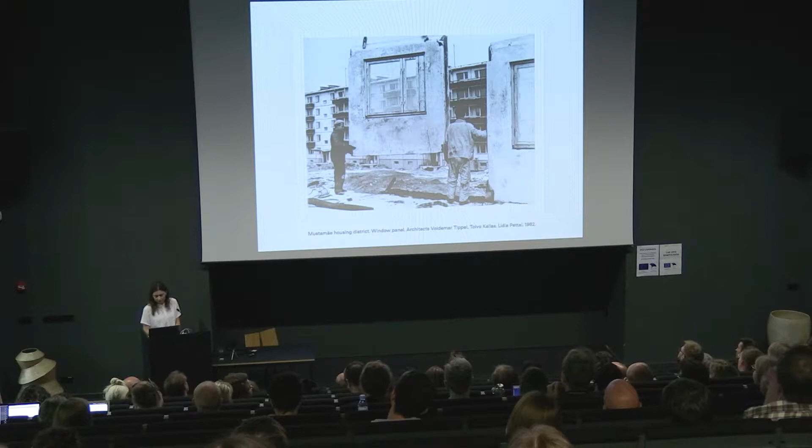Yeah. So the panelization, modulation, and element-based designs, as what we have discussed today a lot. The material innovation was mainly in concrete, or in recent years more in steel and glass. But the timber has risen, meaning that it's reaching higher levels, once again becoming part of the mass production and re-entering the materials library of architecture practitioners.

But nonetheless, the timber construction has the same syntax, tectonics, as the precast concrete panels that we just saw before. And it's also visually quite similar. So for an architect overwhelmed with the abundance of possible directions and applications that contemporary digital tools are offering, the field of construction still remains brutally simple, driven by laws and ignorance towards collaborative work. But of course, it's not only like that.

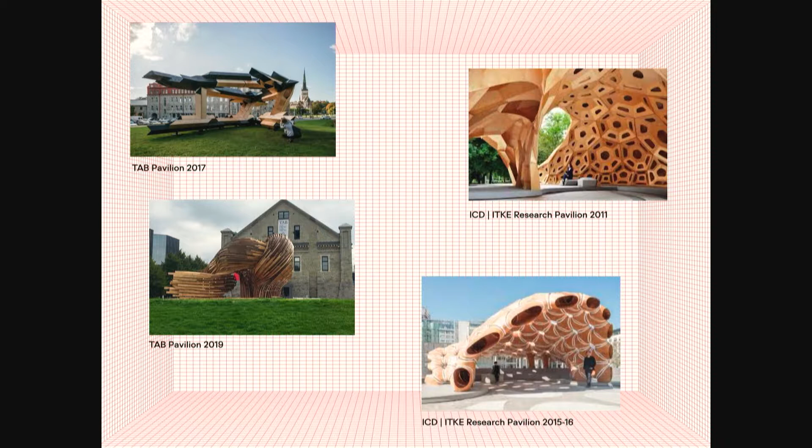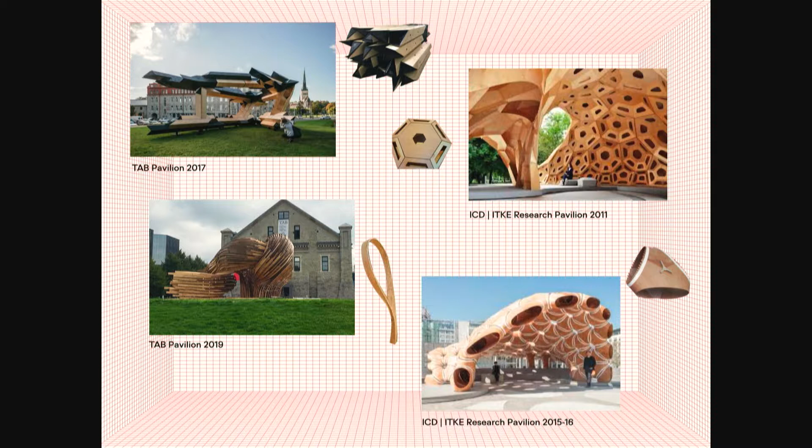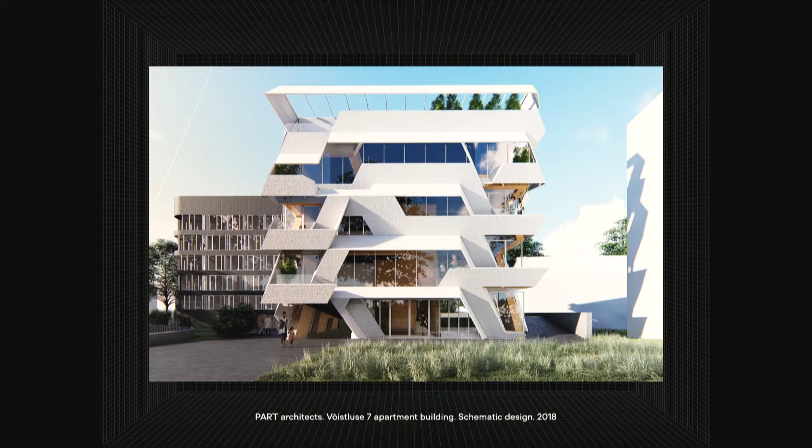So there's also a group of practitioners in the field of renewable materials trying to construct differently, where the new panel, the new module, the element that is repeating has its design implications from the smaller element towards the aggregation of multiple elements. So that's what we have been trying to do in our office, to combine building industry and standardized housing with research into modulation, aggregation of qualities, and of course, above all of that, spatial qualities.

So with this method, modulation makes it possible to move towards more flexible and adaptable architecture. The way we're doing it is to redefine the production chain of architecture from design to fabrication based on the computational understanding. So that has helped us to move from a non-looping method that you see here, what we've been trained in school. You're an architect, you get a brief, you pass it over to an engineer, to the manufacturer, and then it's getting constructed.

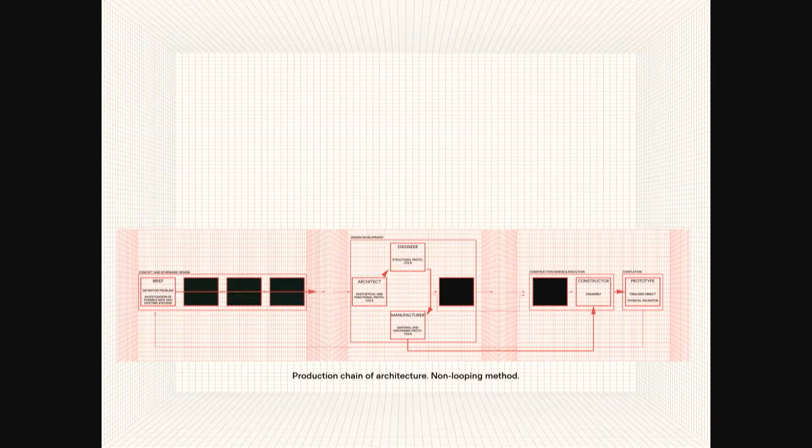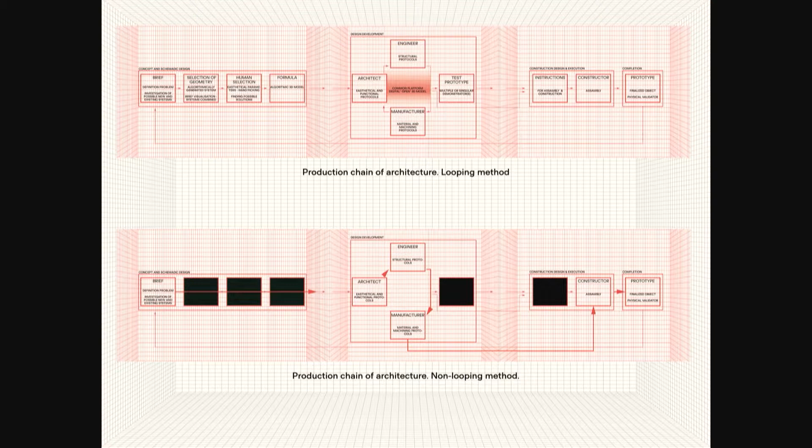And what we've been looking at is a way of creating a looping method. So it's a particular collaborative workflow between architects, engineers, and fabricators. Modulated prototyping provokes apparent design implications in tectonics and space organization. So the dynamic relationship between the digital, the material, and all the parts that have also been discussed before, and of course the design protocols, helps the prototypes become the key elements in design and fabrication process.

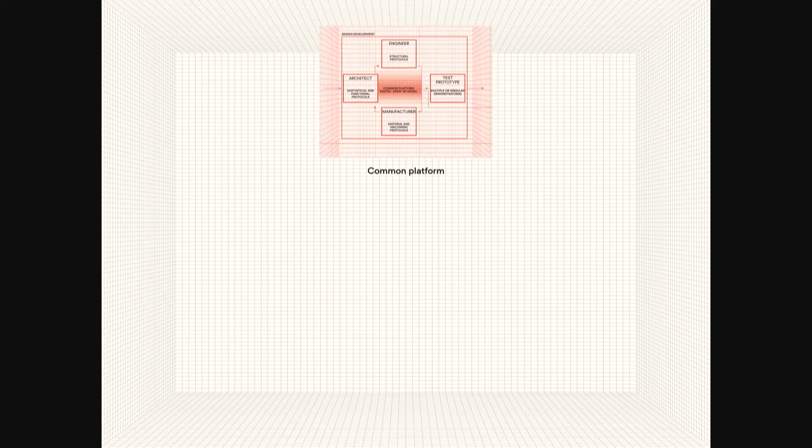So the central part, the common platform where the engineers or the practitioners are meeting, that is based on a discrete syntax, proposes a methodology that allows all component participants to work in a non-narrative manner. But one could also say that it smells like design by committee. So you're aiming for a horse, but you get a camel. I want to prove otherwise by saying that before entering the common platform, an architect does a lot of things, and maybe even more things than beforehand.

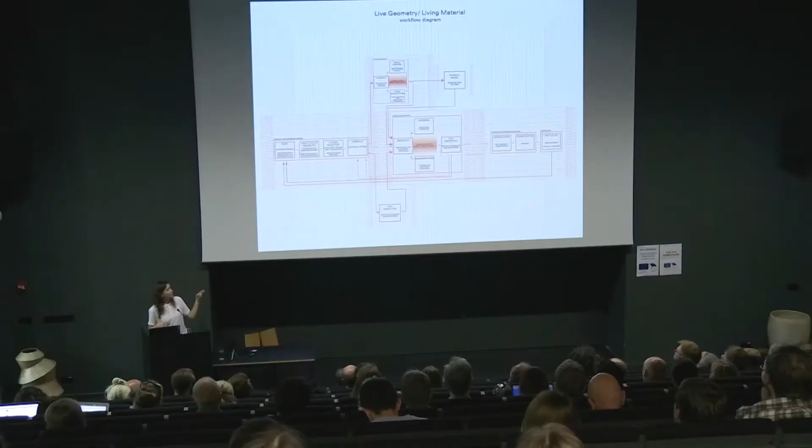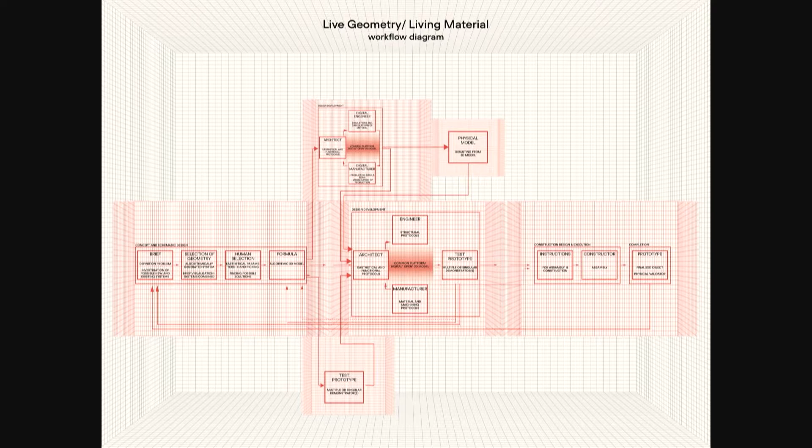And also now the practitioners are in a more constant information flux, meaning that it allows us to work with the live geometry, but also with the live material. And these are the two things that this allows us, meaning that the geometry is alive until the very end of the execution, and living material, that means wood, for example, is constantly being calibrated, remeasured, and informing us. So, for example, where we were designing a 45-meter high design pylon, electricity pylon.

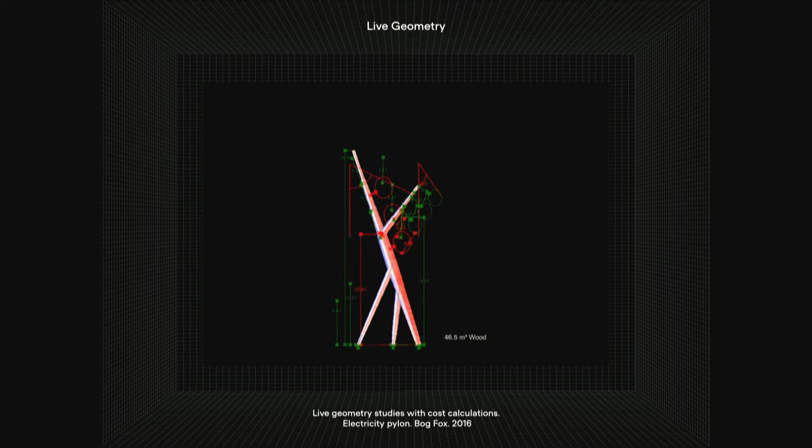We kept the geometry tweakable, so it's constantly calculating the amount of wood it uses, or the engineers applying all the forces there. It's calculating thousands and thousands of simulations of it, but above all, as a designer, there was always the possibility to find the perfect one for the need, and it is under construction at this very moment.

And the other one, this alive material, as said, this workflow also helps to work with it. So in constructing this one in 2015, the properties of the wood were changing because of the moisture, because of different treatments it got. So it saved us from re-milling the files of 350 pieces. Just one night before the fabrication, we got the information that the wood is 2 millimeters thinner than it should have been, and because of that, none of the joints or joinery would have worked. So taking that into account, we could quickly regenerate the outcome.

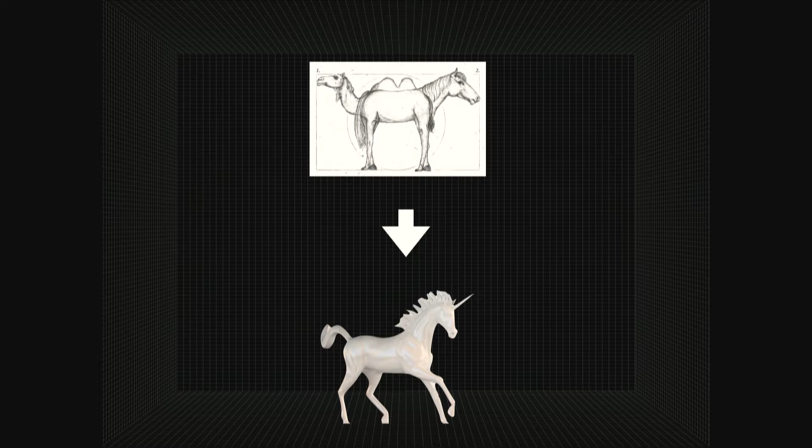So if there's a question, is that bringing us a camel or a horse? I think it brings us the unicorn that is fitter, faster, and more pure to its original design. It's all about the detail, as Jill also said. So this level of detailing allows us to reach better geometry, more specific, and as well working with fluctuating materials. So quick examples of those unicorns.

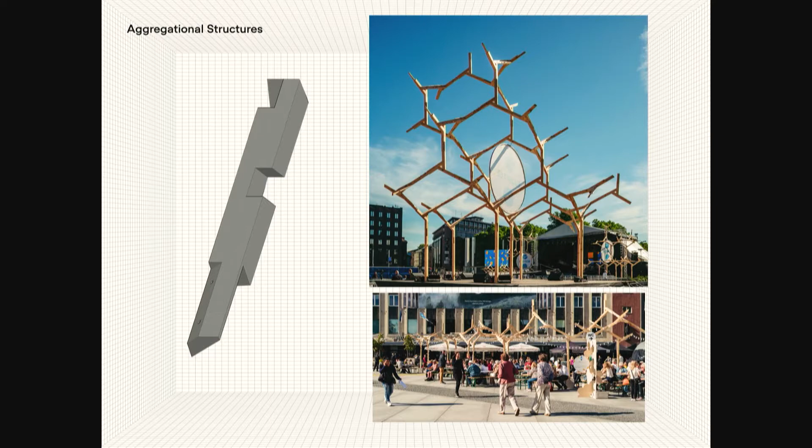So for the last 3 years, we have been working and looking more into aggregational structures, meaning that there's more repetition in the element, and they become the space-defining skeletons. So for example, this one is in the main square, the Freedom Square of Estonia, that was able to define the stages, the moving locations, the sitting areas. But it's all focusing on the structural space-filling elements that are negotiating between the modularity and the smart joinery.

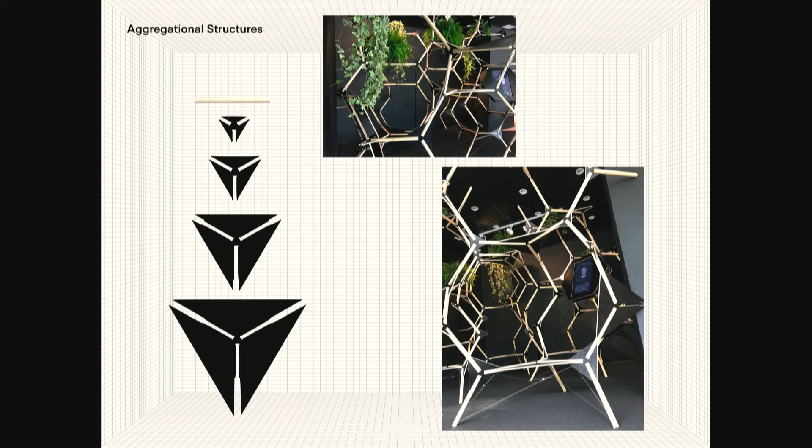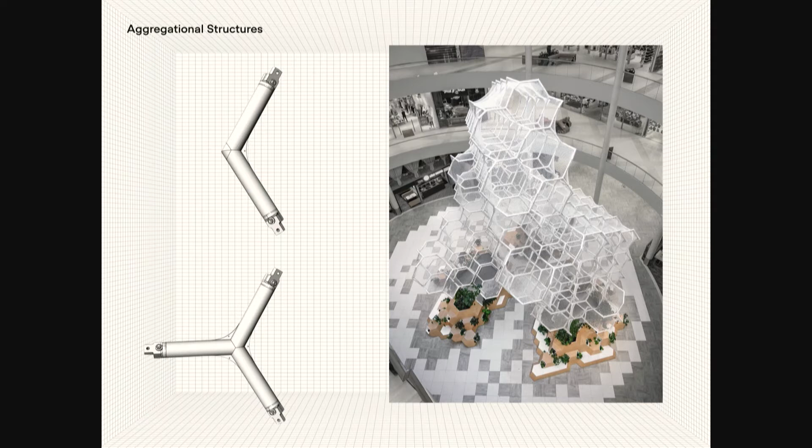And the joinery and the detail is something that has become the design value that then gets into the overall form. We also used a 5-piece method, again a minimum amount of elements to create a maximum area of seating and table. And the biggest one so far is this 18-meter one, again using 2 modules. That is a structure that has no vertical pillars. And all of this is to fill the shopping mall atrium. So in any case, the joinery has become a detail that defines or gives information about the overall shape.

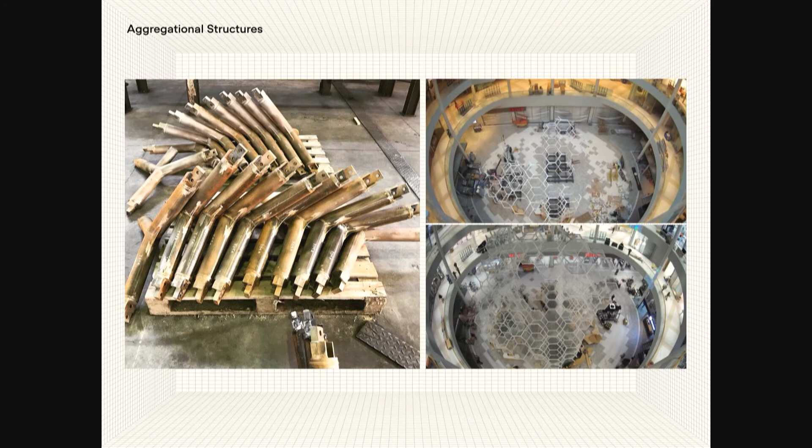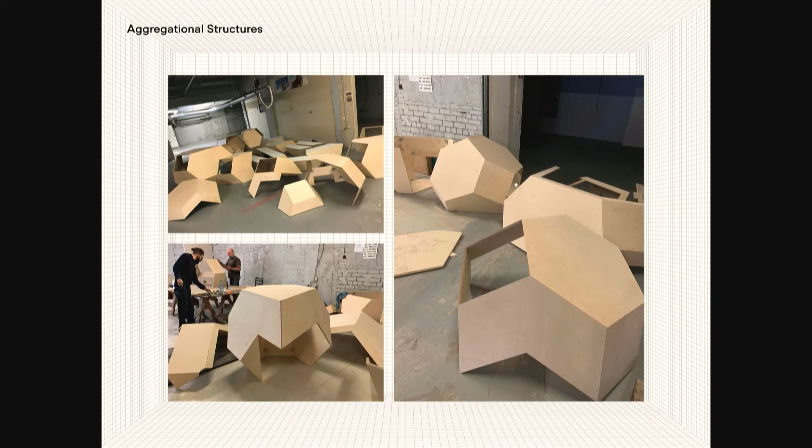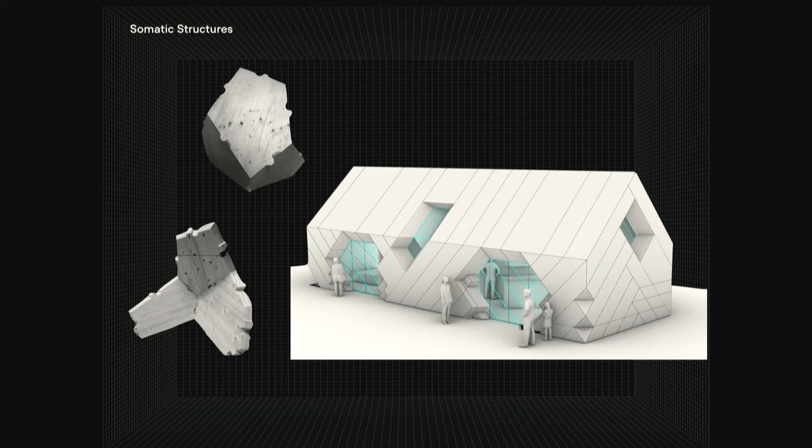So we also, of course, have been looking into more somatic structures, as we call them. So things that are structure also gaining space-defining membrane qualities. And that brings us to the bigger scale, where somatic structures have more closed modular elements that carry the structural qualities and also space-defining qualities. And these are the prototypes where we used for the first time in Estonia the 5-axis CNC for creating the CLT panels.

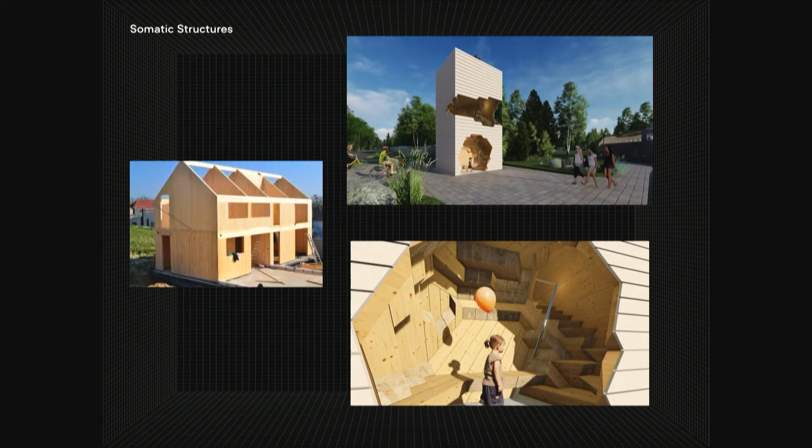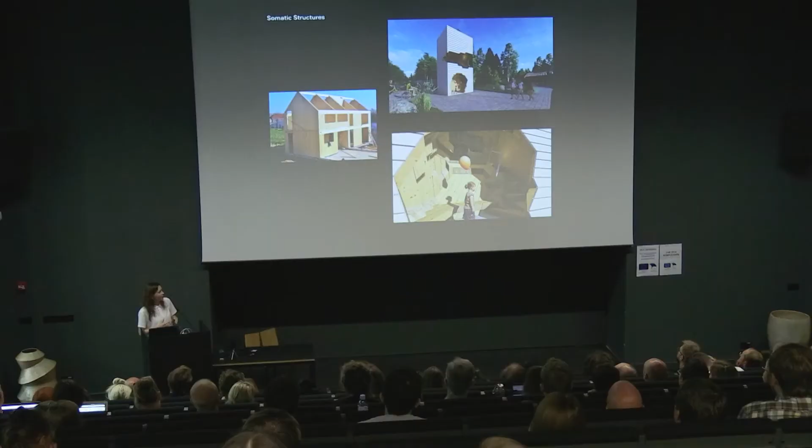Or we work close to the fabricators as well, who are saying that by producing those buildings, they have a lot of CLT leftovers, because all the windows and doors cut out of those big CLT planes could maybe be reused in constructing in our way, meaning smaller pieces, more aggregated, and in that sense also bring back the human scale.

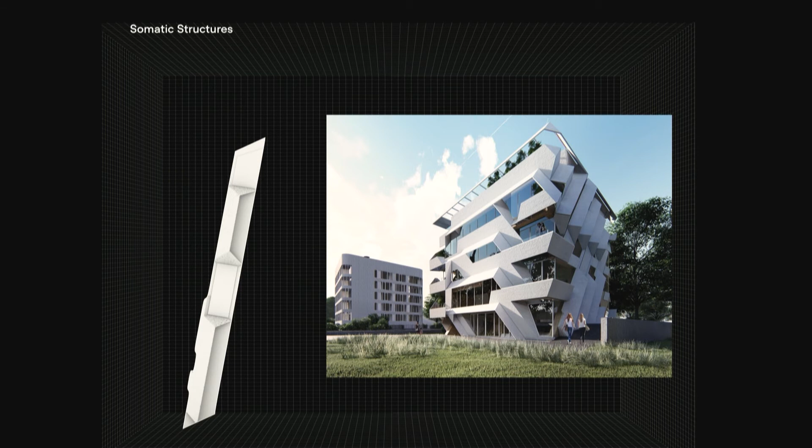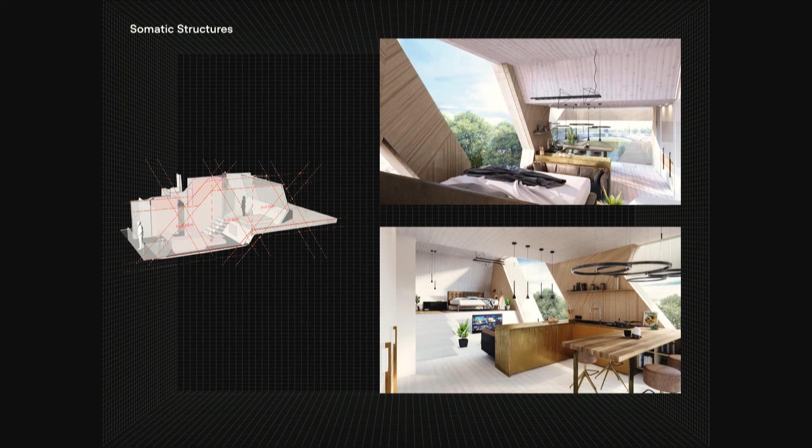And the last project, the apartment building: we're constantly evaluating the relationship between the design protocols and the prototype outputs, then looking at the one module, which we haven't constructed yet, which constantly helps us also to define the space. And the spatial flexibility that those modules give us is also helping to keep the readability of the module. Maybe not as pure as in Jill's cases, but it is organizing the compact system of the modules, functioning as structural elements as well as surfaces. So the purity of the material is actually here. We don't need to cover the interiors with any other plate materials.

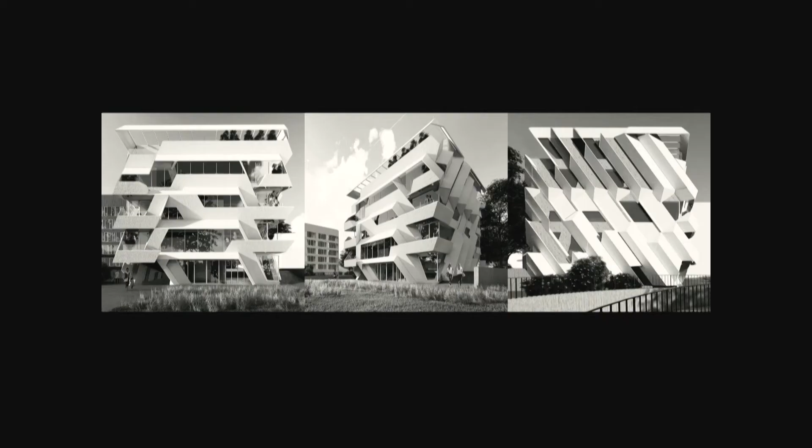So the methodology of the workflow analysis has given us new knowledge about how we design from part to whole, from detail to overall. So the applied protocols, parameters, and physical material prototypes are providing specific tectonics and allowing us to emerge and extract new designs from it.